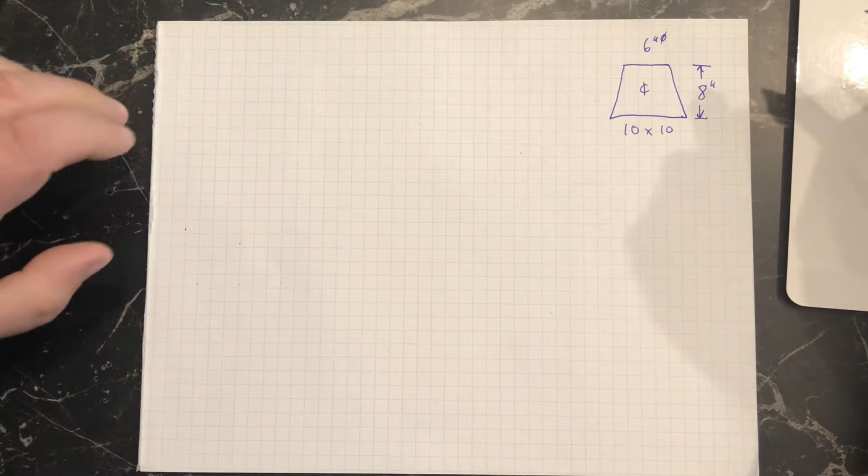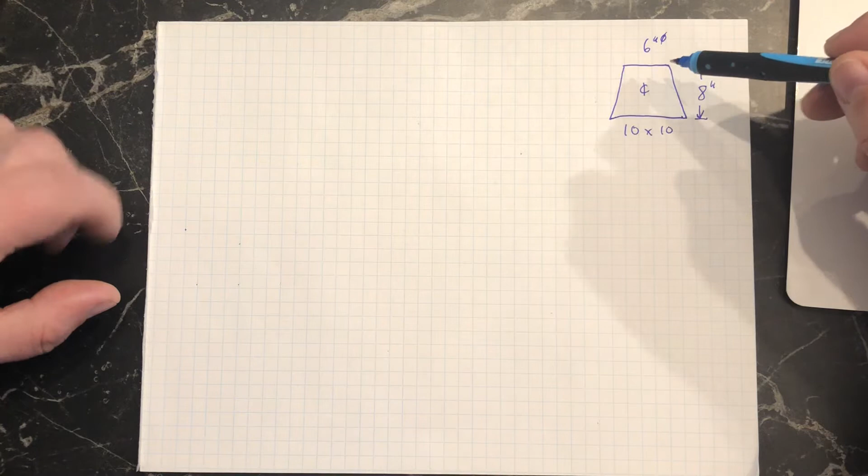So I have a square to round here that's going to be 6-inch round on top, 8 inches tall, and then it's a 10 by 10 square bottom. It's on center both ways. So the very first step you need to do is make a plan view drawing of this. So I'm just going to start off by drawing a plan view in this corner.

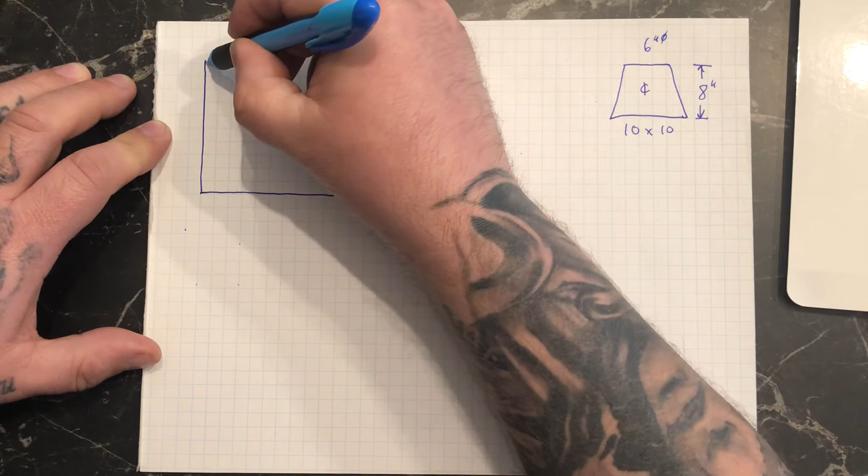So 1, 2, 3, 4, 5, 6, 10. So it's going to be freehand, but I got grid paper here, so this should help me keep it pretty straight and easy to see. All right, and then there's our center.

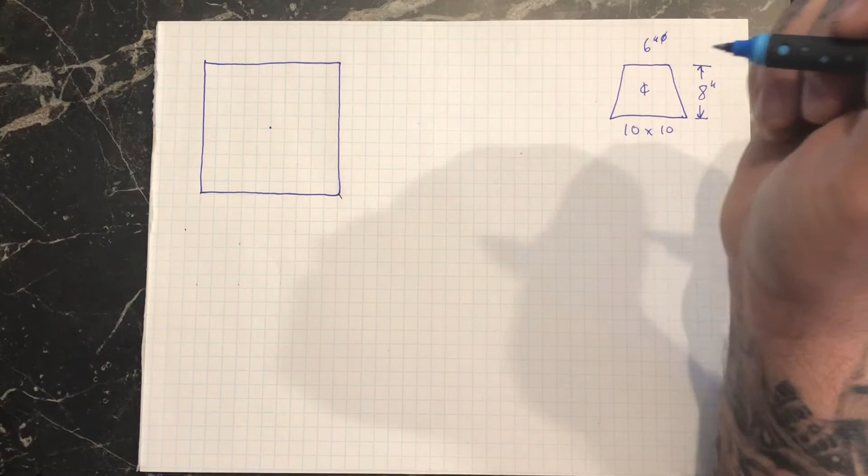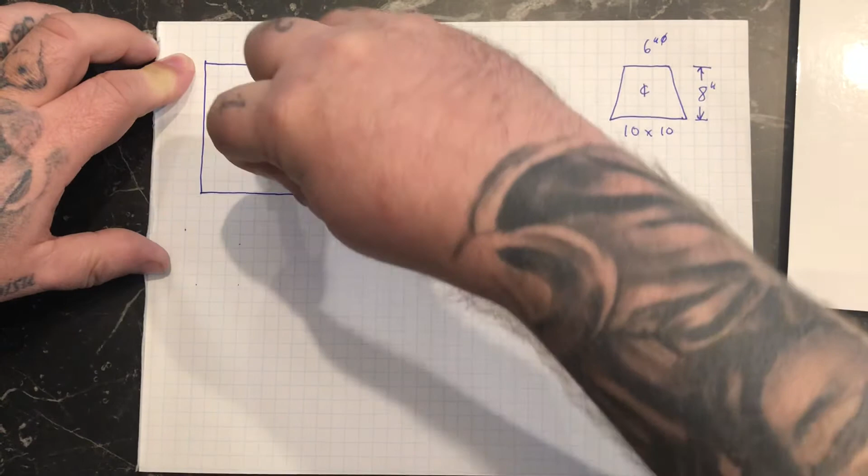Okay, so now I'm going to use a compass here to make the 6-inch round part. So I've already got it preset. Hopefully this shows up okay. I'm doing a full plan view here just so you guys see what it would look like from the top of this fitting. Okay, and then using the radius that I got to draw that circle, if I go to the center points of the circle, I can use that same radius to divide it into equal spaces all the way around.

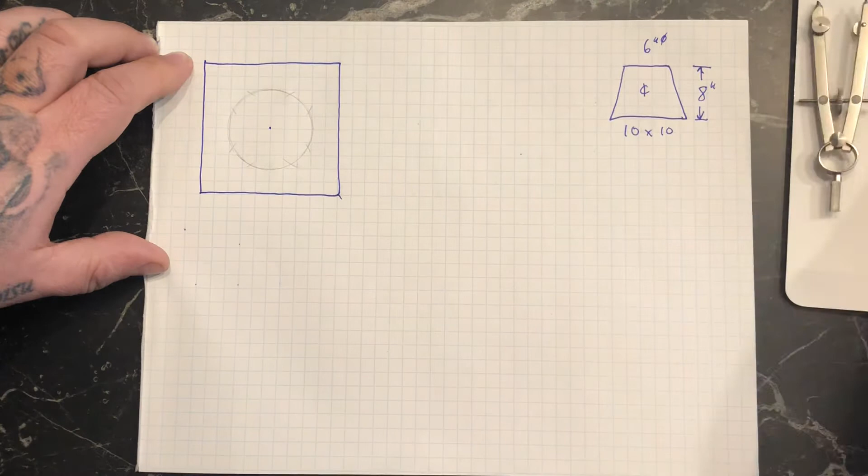I'm just gonna split this fitting in half because laying out by triangulation like this, you want to have 2 half patterns. I only need 1/4 of it to actually lay it out because this corner, this corner, this corner, and this corner are all exactly the same. But for the ease of this layout, I'm going to show you the full half pattern here. So I'm just going to darken up these points so they're easier to see.

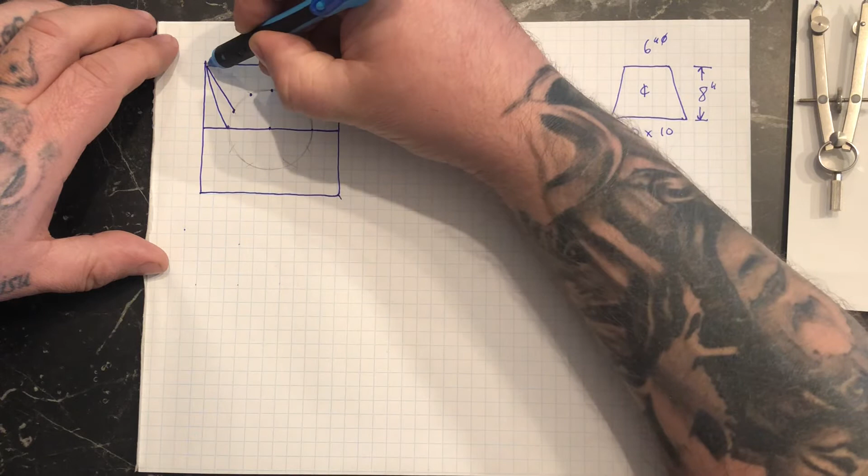So each one of these points now gets drawn back to the corner. So from this corner here, I'm going to go right to the center, and then to this division, and then all the way to the center here. And then I'm going to repeat that in this corner. Okay, now you can see this corner and this corner are exactly the same. I'm just going to darken up the circle. So there we have a half pattern in the plan view.

So the next thing I'm going to do is label it. I'm going to do the square parts with letters. So I'm going to go A, B, C, D, and my circle part I'm going to label with numbers. So we got 1, 2, 3, 4, 5, 6, 7. All right, so that's step number 1, making a plan view that's labeled and all to scale.

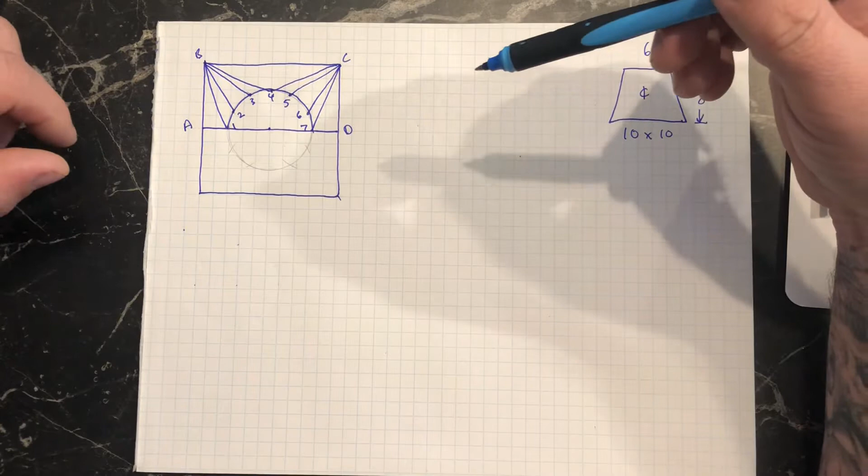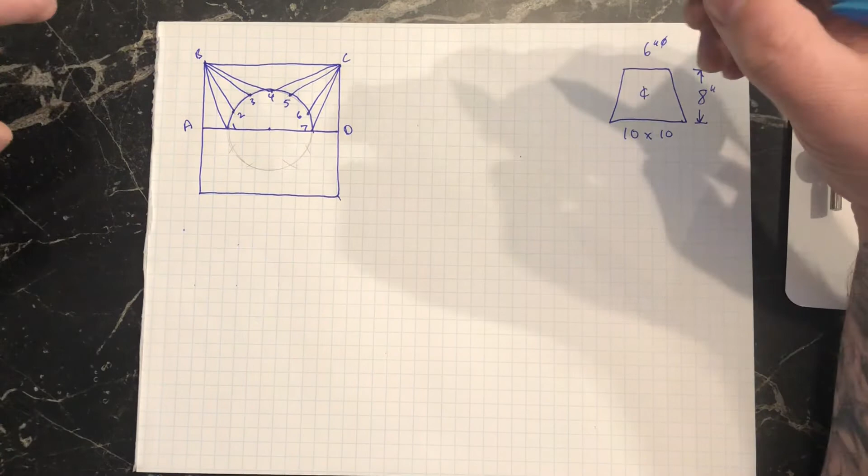Now to lay out this pattern, it's basically triangulation. The definition of it is having 2 known points to find a 3rd unknown point. So in this view here, I can have a distance from this one view. So I have a known length here, but I need a known length in another view as well, so I can find the 3rd length.

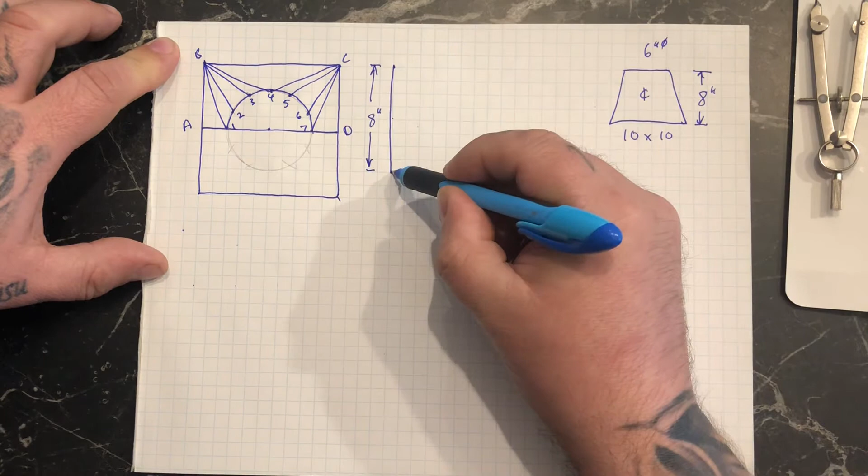So if this square to round is 8 inches tall, I need to represent that in a true length triangle. So if I just make a true length triangle here that's 8 inches tall, so we got 1, 2, 3, 4, 5, 6, 7, 8. So it's 8 inches tall from here to here, 8 inches. And then I'm going to just do an arbitrary length out this way. So this is where I'm going to be plotting measurements from here, so I can actually make a hypotenuse, which is going to give me that third length, or the true length.

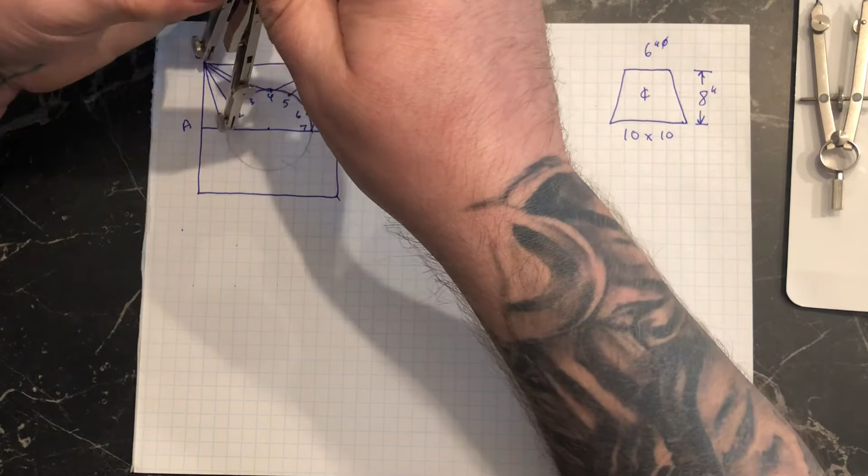So if I take these measurements here, so from this corner to the number 1, if I measure that, and then transfer it over to the baseline here, starting at the bottom and moving it there, then that hypotenuse becomes the true length for this B1 line.

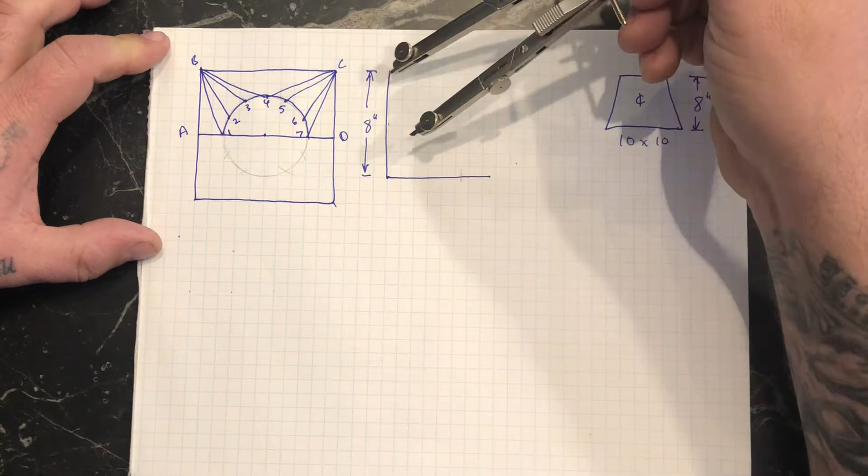So again, take a measurement of B1, put it on the baseline here, and then from the top of that 8 inches down to the baseline, that's going to be a true length. Now with a square to round on center, there should be a lot of lengths that actually end up being the same. Because I freehand, this might not translate super well, but

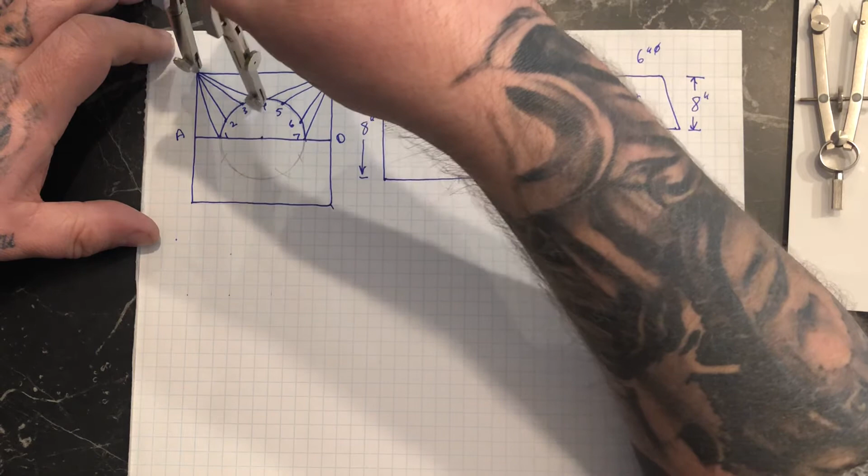B1 and B4 are going to be the same, which means C4 and C7 are also the same. So I can actually label that on here. So this first line I did is going to be B1, B4, C4, and C7.

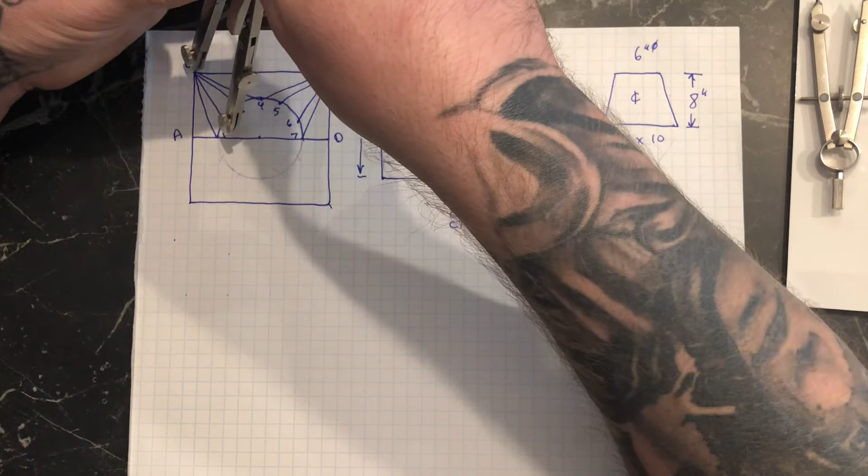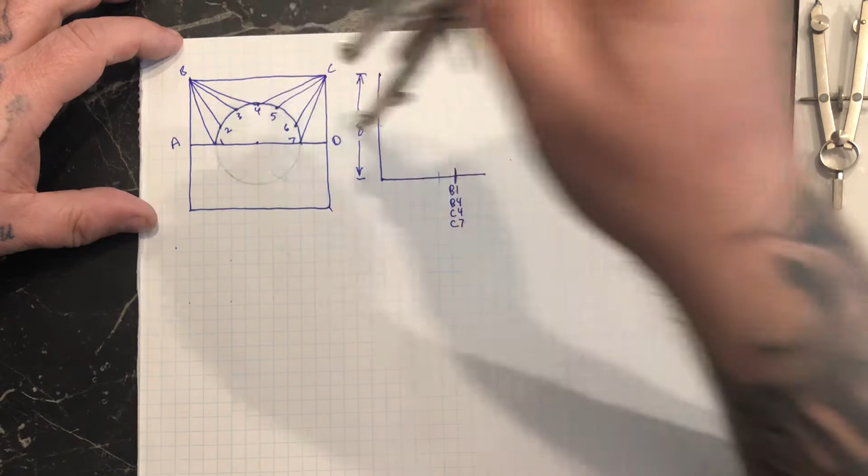Now the next one I'm going to transfer over is from the corner here on B to 2, and I'm going to put that on the baseline here. And again, because it's on center, B2, B3, C5 and C6 are all the same. So when I transfer them over on that true length triangle, they're all gonna be the same length.

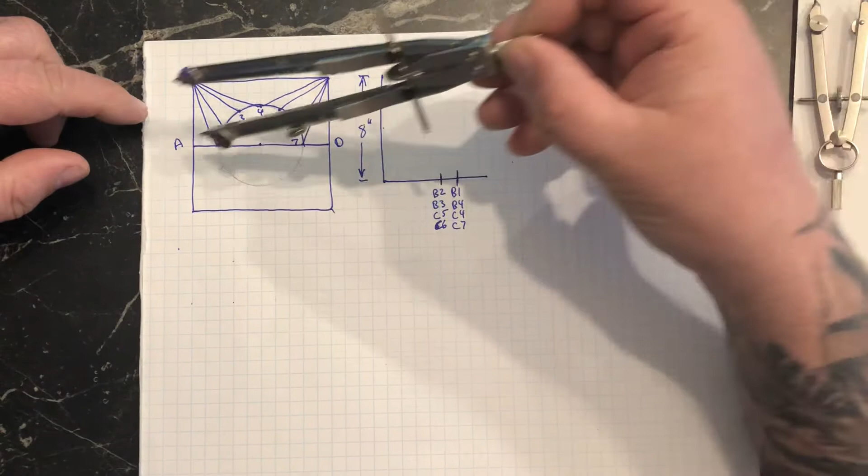So B2, B3, C5, C6. Those are all the same at this point. Now there's 2 more measurements I need to put on there, and that's going to be my A to 1 and D to 7, because in this view they're not true lengths either.

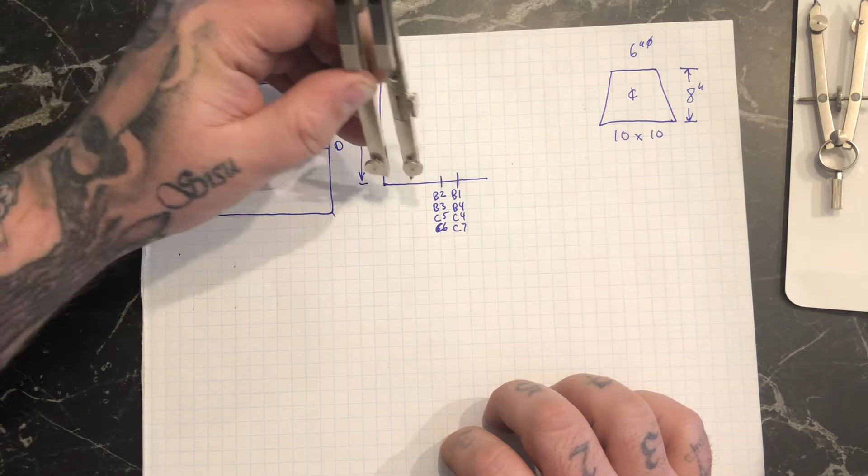In the plan view here, the only thing that is a true length is A to B, B to C, and C to D, because they're perpendicular to my plane of view. So I need to plot these out so I can get a hypotenuse to make a true length. So if I take that measurement there, A1 and D7 are going to be the same. So plot them on the baseline here.

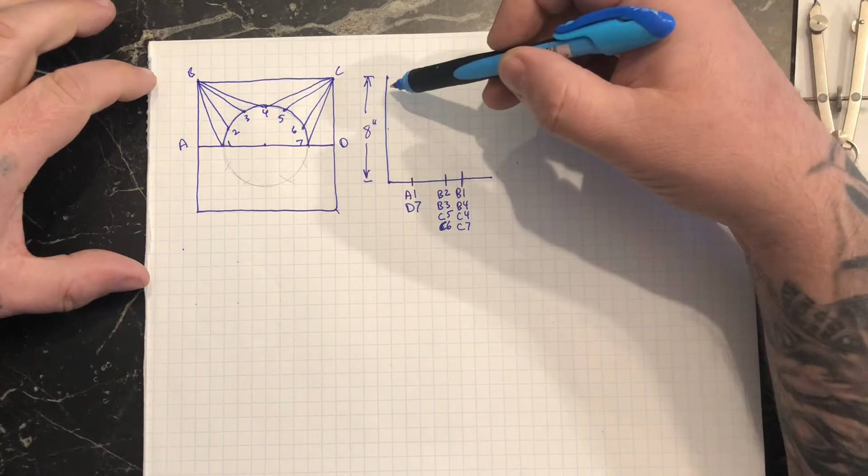A1 and D7. All right, now I have all my plan view lengths. And then if I have my elevation view height here, I can get a hypotenuse for each one of these and make it true length. So the way to actually lay the pattern out as a half pattern, I'm going to start with the middle of the pattern, which is right here. B, C to 4. That's the very first triangle I'm going to lay out.

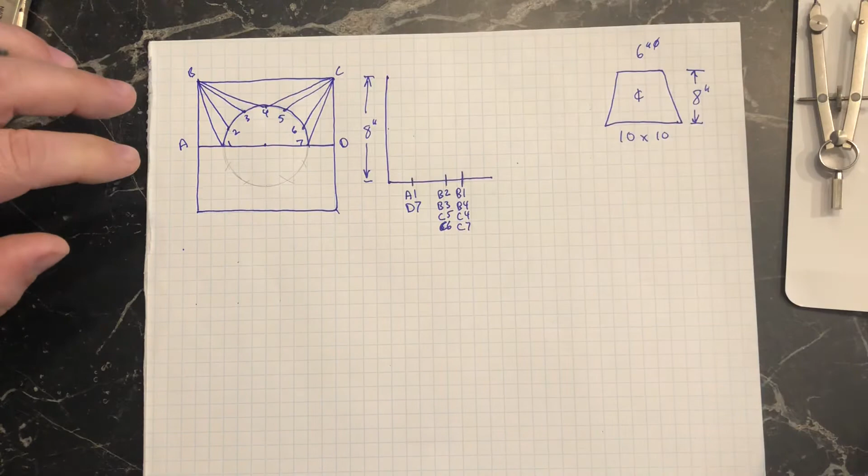And that's basically what triangulation is. Finding triangles and then drawing them in a true length form. So I'm just going to start with the BC. And imagine if I was standing in the middle looking this direction, for it to be an inside pattern, B would be on my left, C would be on my right, just the way I'm looking at it now.

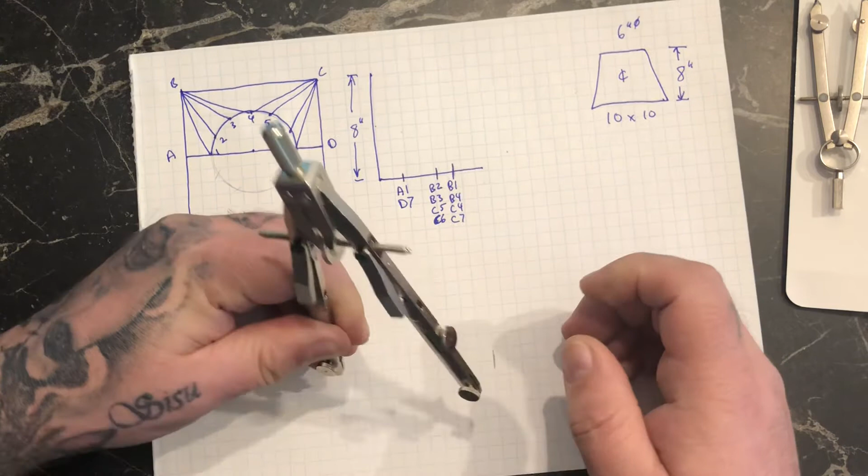So if I start taking a measurement here of BC, because it's a true length, I'm just going to plot it right here on the bottom, B to C. So this point to this point, there's my B, here's my C. And I'm going to connect those with a line. Now the next point here is 4, right, to close this triangle in.

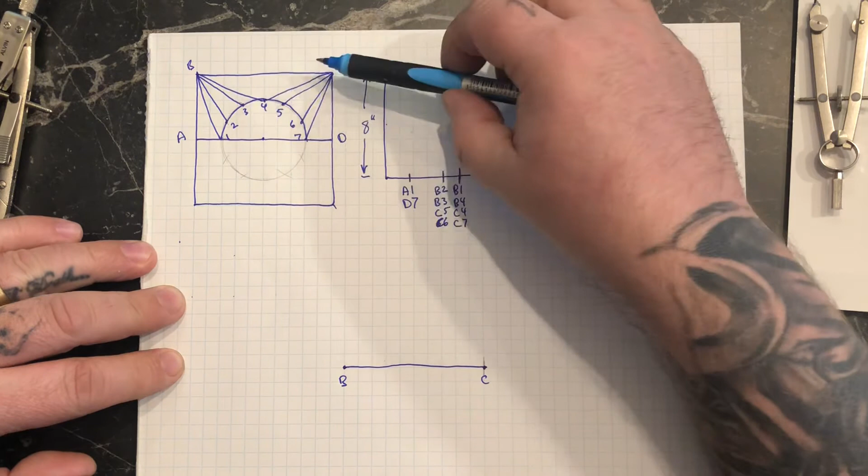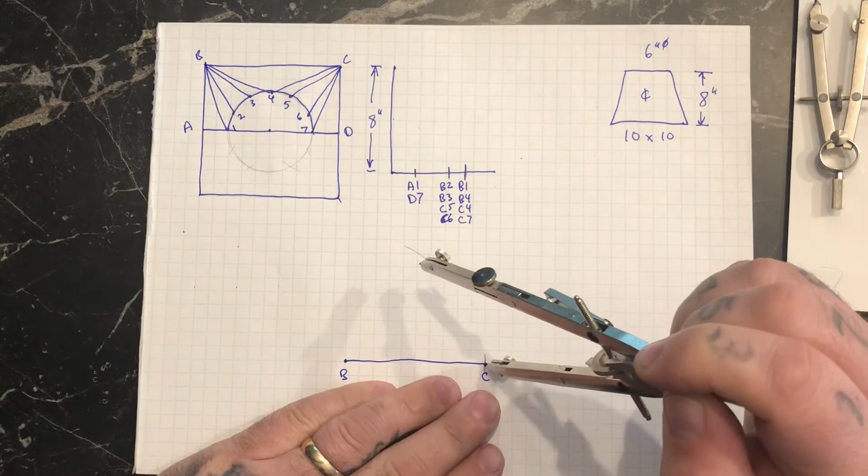So B4 and C4, and if you remember when I first plotted them out, they're both in this column here, the same length. So if I go from the top of my true length triangle now and take this measurement right here, that hypotenuse of that triangle is a true length. So now I'm going to go from my B to number 4, and then my C to number 4. So now this point here becomes number 4.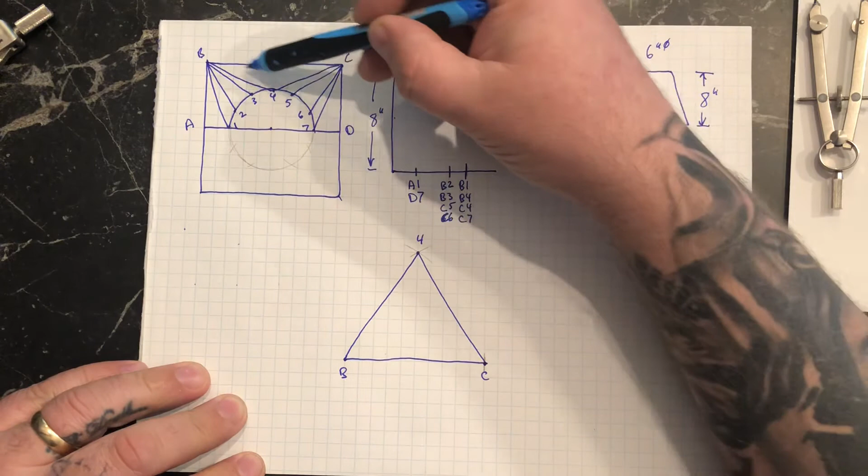And if I draw lines to connect them, there's that triangle in true length form. This is actually what it's going to be in reality. So this triangle from this view is that triangle right there. So now I'm gonna just start on my B side here.

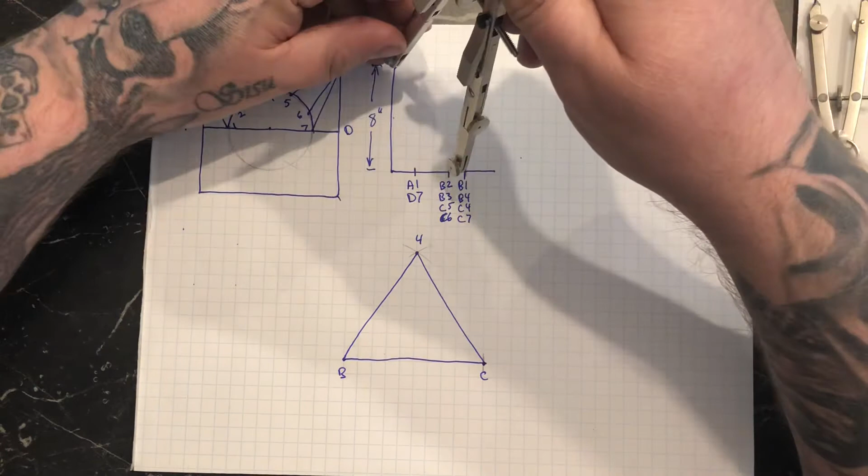Actually, what I do on this side, I'm also gonna copy on this side because the lengths are the same. So I'm gonna take my B3 and my C5. And those are both from this next column here. So from the top, take this measurement. So B5 and C, oh sorry, that was B3 and C5.

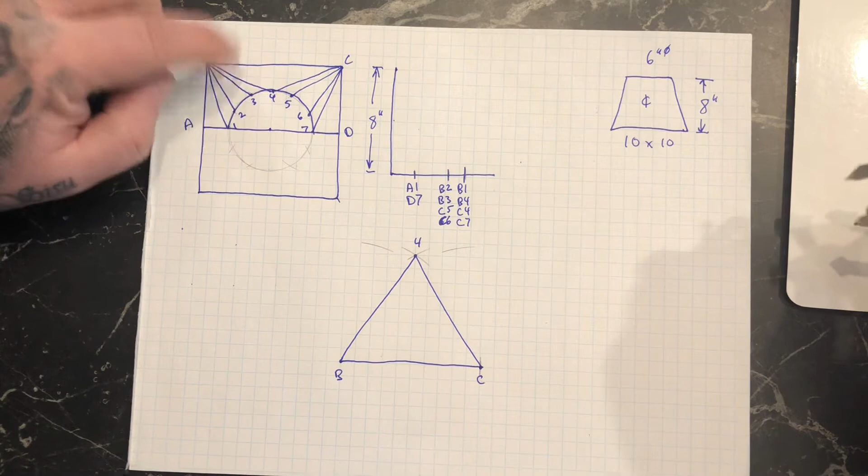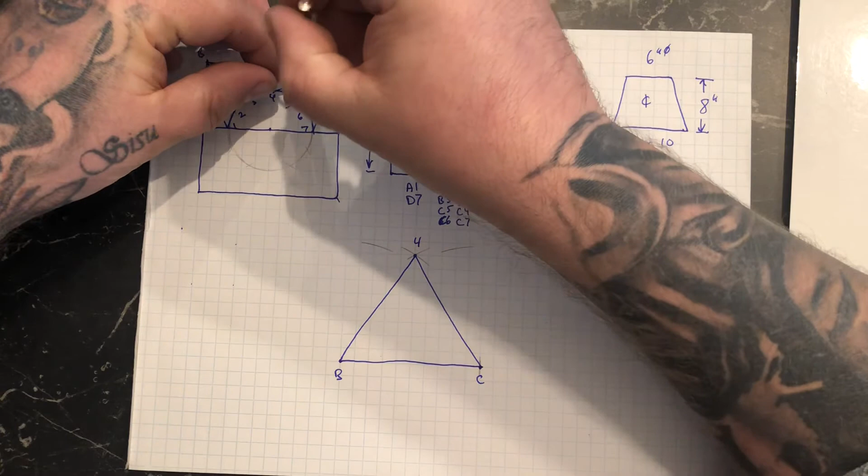Right? Now, the next thing I need to do is go from 4 to 3 and from 4 to 5. So I'm just going to take a chord length here from this plan view. Make sure that they're somewhat even. So now this is going 4 to 3 and 4 to 5. I didn't quite swing those long enough.

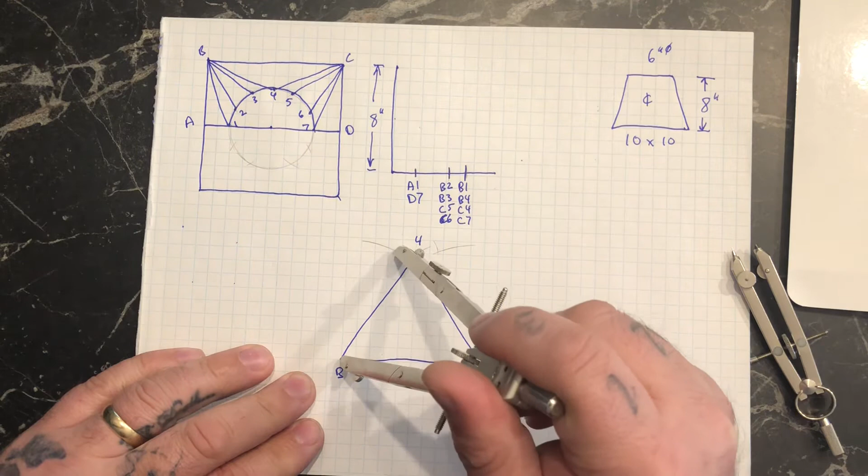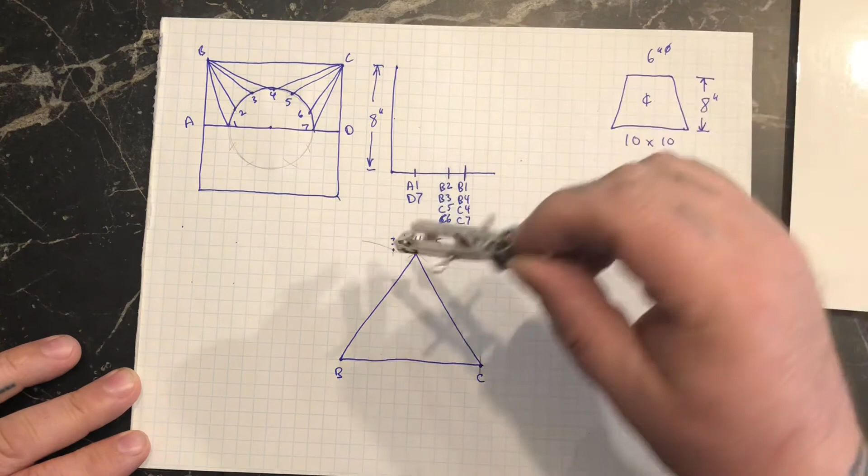That point there and that point there. So we have 3 and 5. If you note, I've actually got 2 compasses set up here. One that's short, and I'm just gonna leave this one for my chord lengths on this plan view just preset, so all I have to do is step them off now. I don't have to keep adjusting it. And my larger one here where I can transfer these measurements pretty easily.

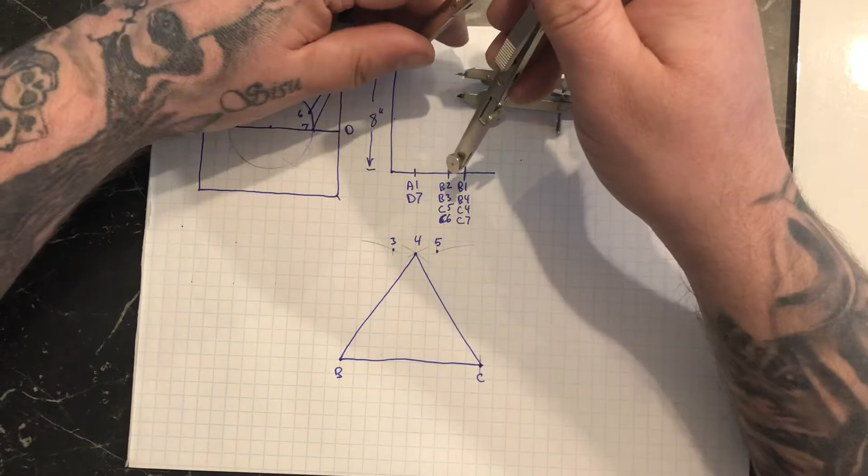Now, if you remember, my next ones here are gonna be B to 2 and C to 6. And if you remember, 3, 5, 2, and 6 are all the same length, so I don't really need to change anything here. They're still coming from this point here. And that arc I've drawn, if I just extend it out a little bit, it should be enough to cover that. So now I'm gonna go from 3 to 2 and then from 5 to 6. So first from 3 to 2 and then from 5 to 6. 6, 2.

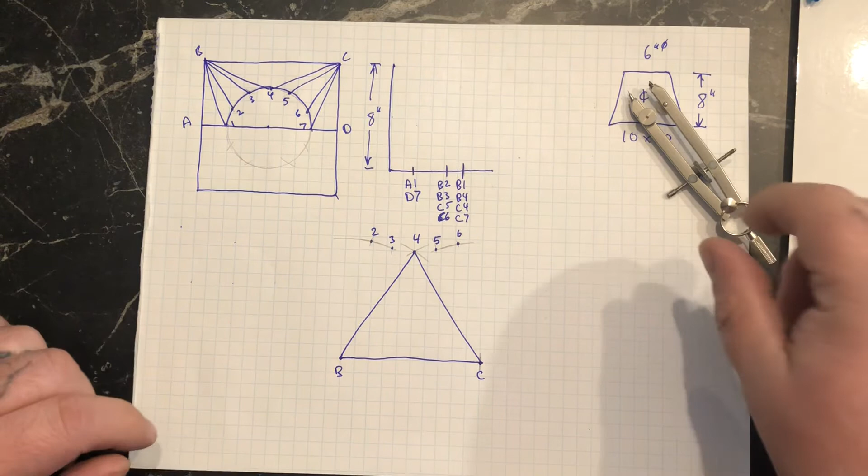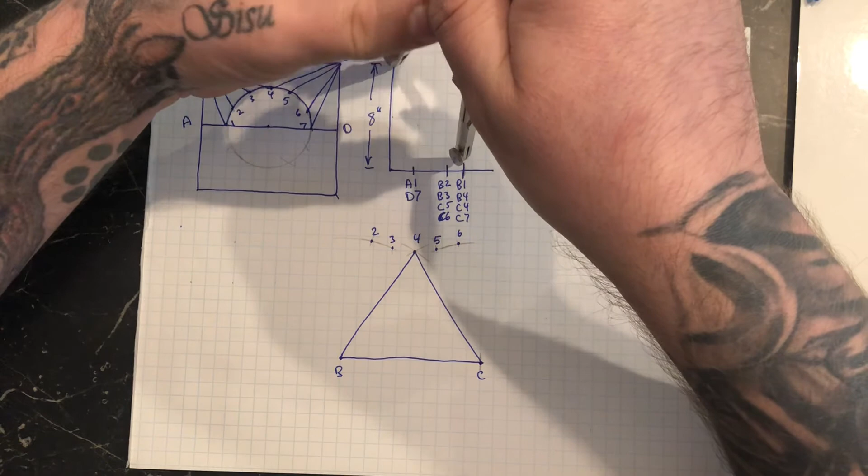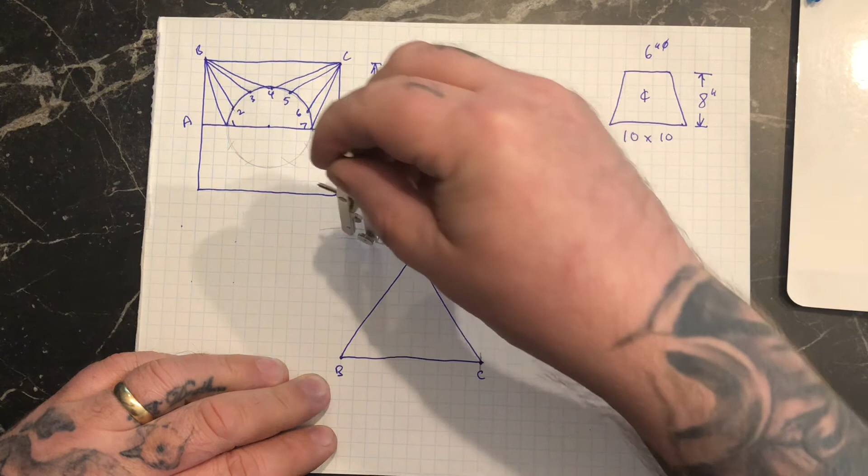And now finally I need the B to 1 and C to 7. So that's again going back to this longer length here. B1 and C7 are in the very last column. So I'm going to take that hypotenuse there. And B1, C7. I use my small compass because it's already got those preset. 1 and C7.

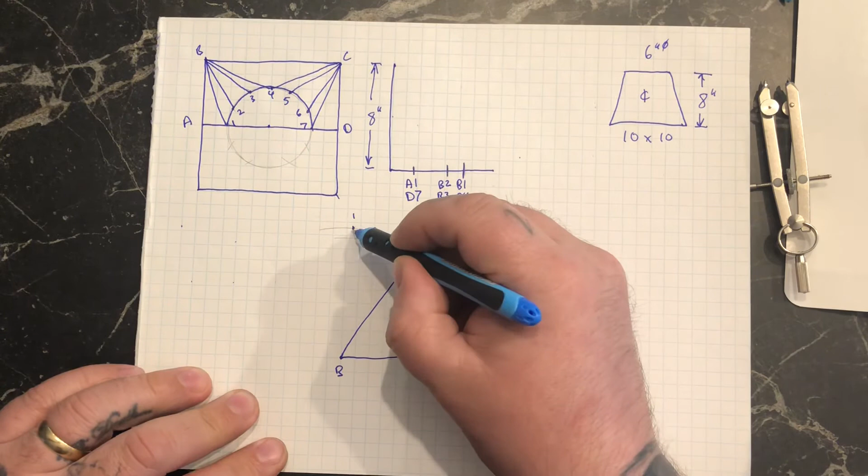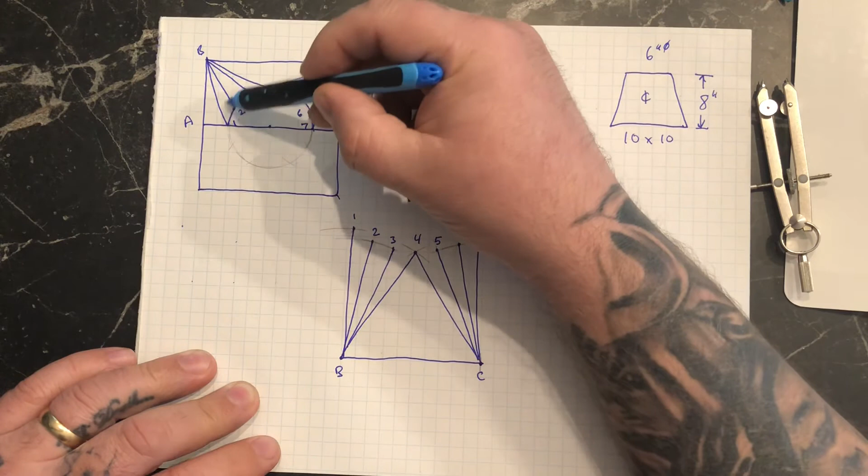Number 1, 7. So now all the numbers that are in the round part are all done here. So now I still need to finish these wings. So I'm just gonna connect these lines so you guys can see what we've done so far. Right, so 1, 2, 3, 4, 1, 2, 3, 4. We have all the same lines matched in here. I can actually connect my round part.

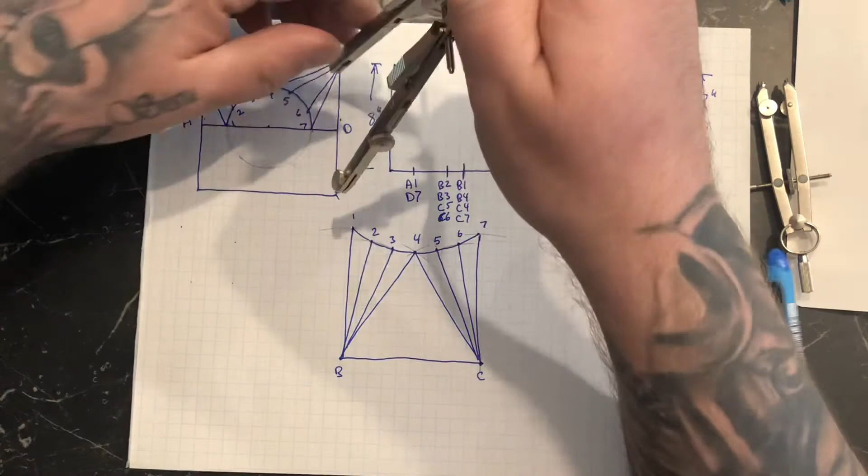But now I need to go from C to D and B to A. And if you remember, these are true lengths because they're parallel to my plane of view. So I just need to take the measurement here, C to D. So C to D, remember I'm going from C though, so it's at the bottom here, C to D. And B to A is also the same measurement. So I'm gonna go B to A.

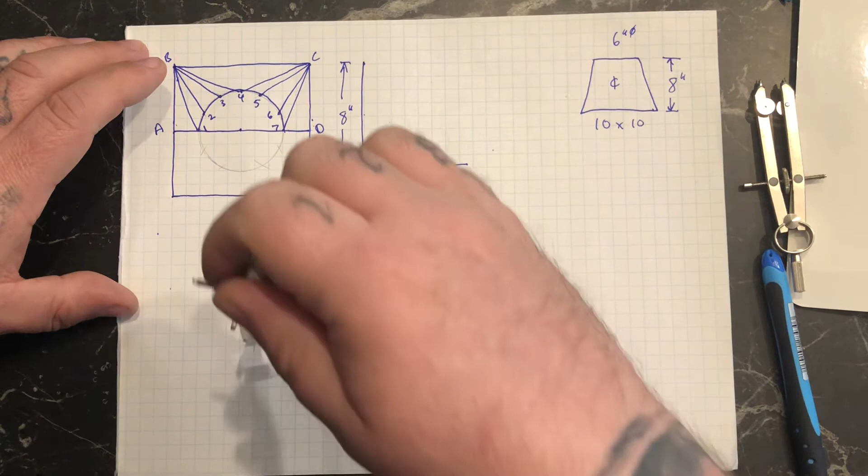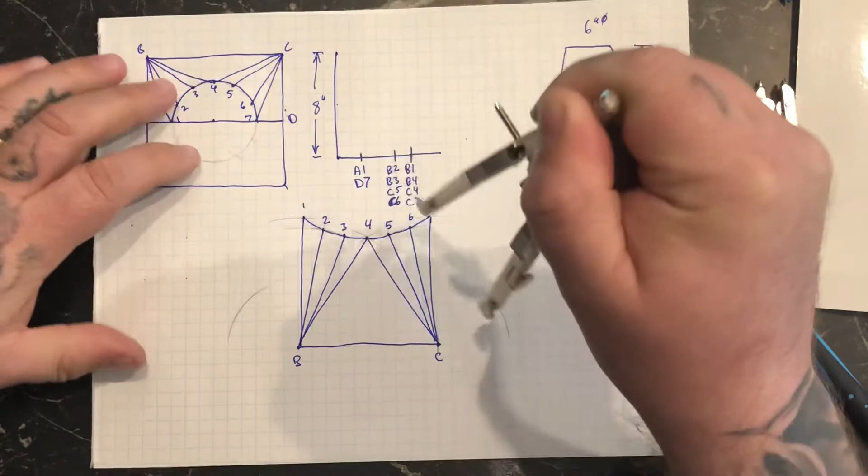And now I need to go from 1 down to A and then also 7 down to D. So, because it's going from 7 to D, 1 to A, those are on the last part here on my true length triangle, the last 2 measurements. So if I take this hypotenuse, and I'm going to go from 7 to D, and 1 to A, D, A, I have completed this fitting. Well, the half pattern anyway.

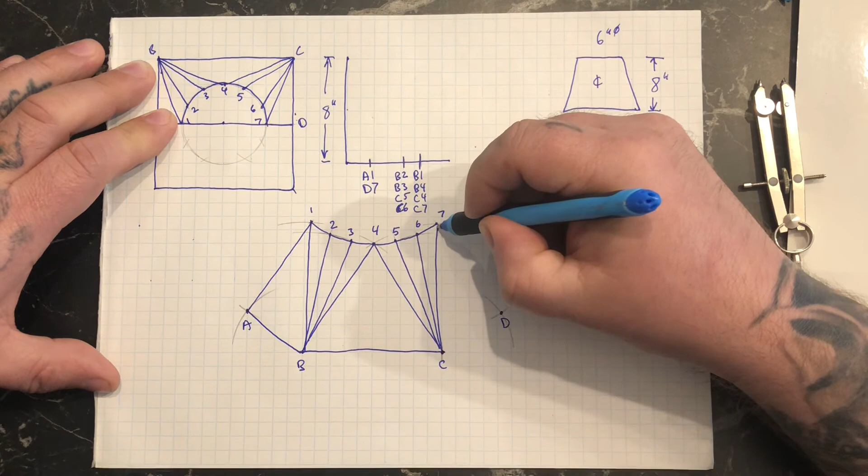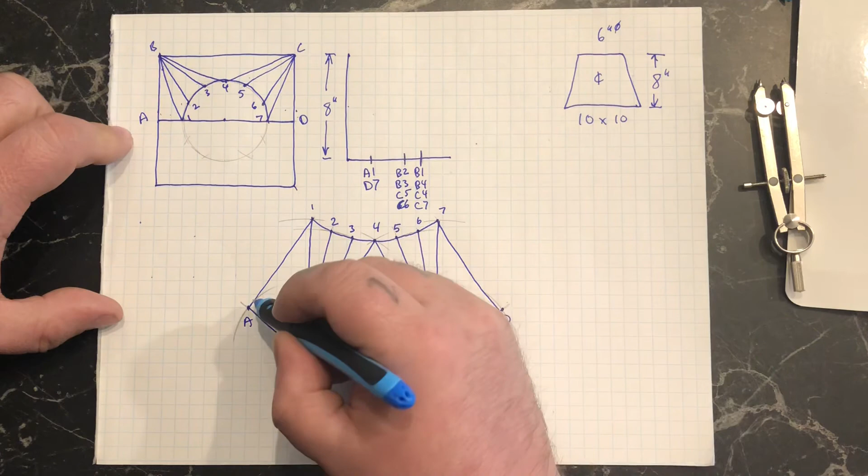So 1, 2, 3 big triangles, and then 1, 2, 3, 4, 5, 6, 2, 3, 4, 5, 6 little triangles. And that is a completed half pattern. The way to double check to make sure it's right, this should be a 90-degree corner here and here. And this half of the pattern is going to look exactly the same as this. So all I'd need to do is flip this over and trace it, and then I have 2 half patterns.

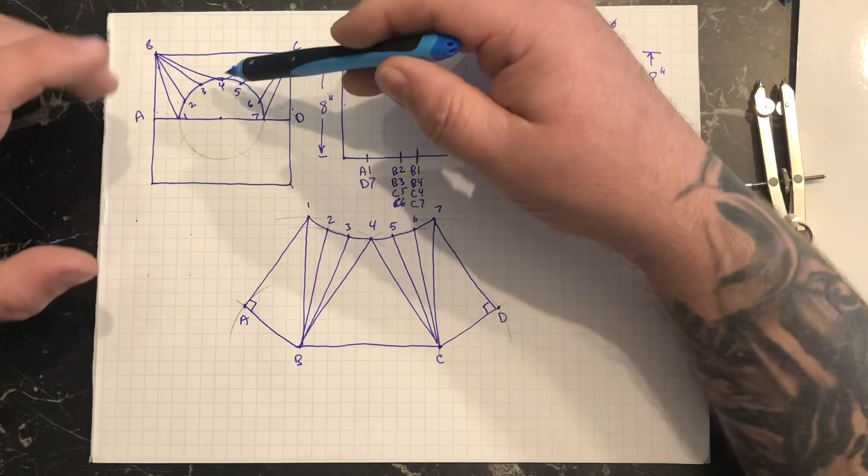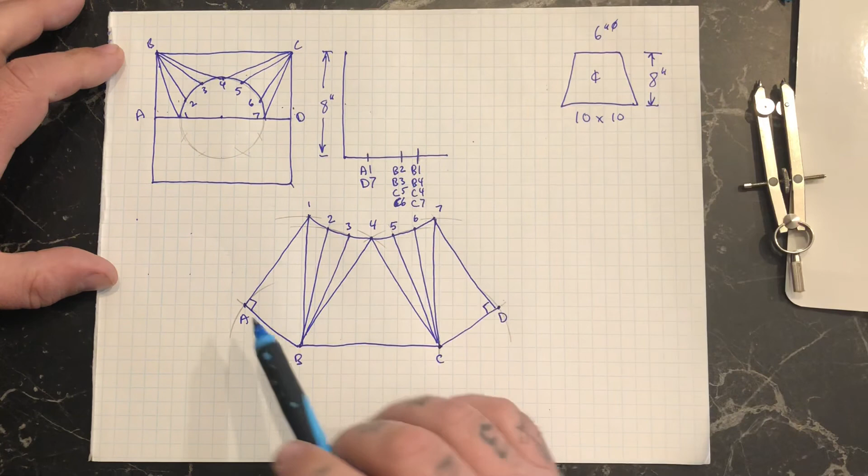Now, if this was a square to round that was off center in any way, I would definitely have to do at least a half pattern. And if it's off center in both ways, like if the circle was down here, I would have to draw a full plan view, and there'd be a lot more numbering and transferring. But it's the exact same process, just taking measurements from this view, putting them on a true length triangle, and then laying it out the way I've showed you. And that's basically it.